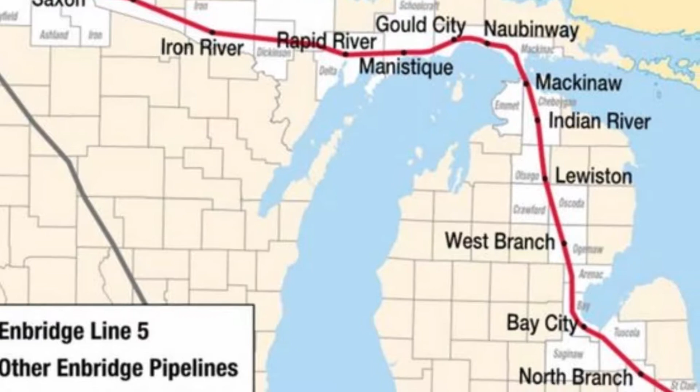It started because the Enbridge pipeline is aging and people are concerned about it rupturing or it being hit by an anchor or something. Back in April, there was an anchor strike that hit the Enbridge line and it tore the ATC transmission line, which leaked hundreds of gallons of their fluid. And so we have seen that this thing is a very feasible issue. It's something that could happen.

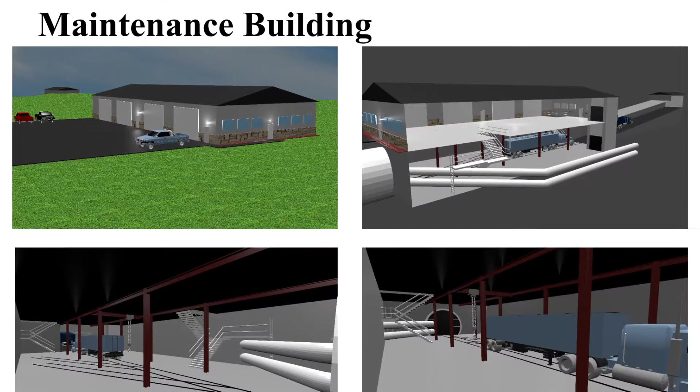This group is a team of Michigan Tech students who conceptualized a tunnel design and presented it to legislators earlier this year with the presence of Enbridge officials, who are using the presentation and its research as a starting point for the upcoming build. They were very confident in our information. They felt good about using the information to try and make their point. And so it was really nice, just being undergraduate students, to actually be taken very seriously.

Currently, the line crosses the straits in two parallel tubes about 3 miles west of the Mackinac Bridge and allows for the transport of petroleum products to Sarnia, Canada, traveling along US 2 in the UP and I-75 in the lower for much of its journey.

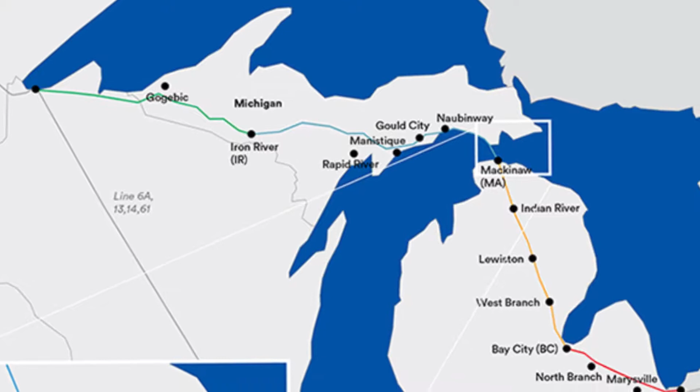Once construction of the tunnel is completed, those lines would be removed from the lake bed and placed in the tunnel where they would be isolated from the natural waters, theoretically preventing a disaster if a line failure were to occur in the crossing. It wouldn't leak out, or at least not so much, into the environment, and they could easily clean it up within a contained tube, basically.

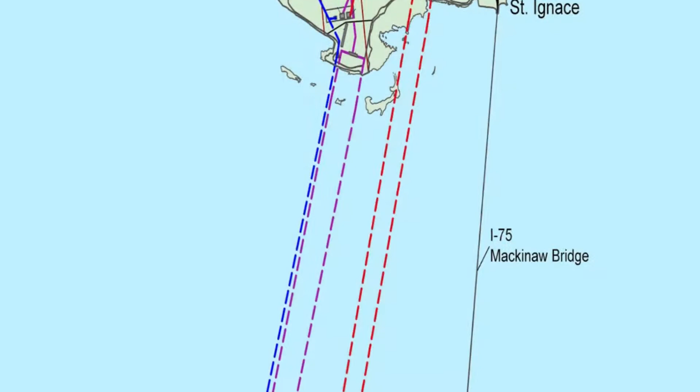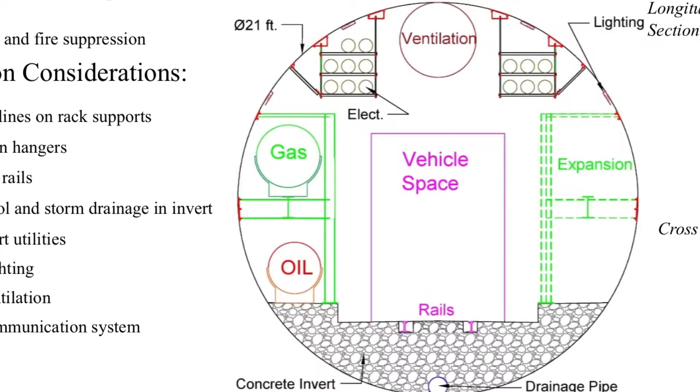While conducting their research, Michael and his team discovered that there are other things that cross the straits in that area as well. And the design that they presented legislators would allow for safe crossing of those lines through the same tunnel. There are many electrical lines, there's a natural gas line, and then there's the Enbridge oil line. And so there's quite a few down there that it would be good to encapsulate them all so we don't have any leakage of any of them.

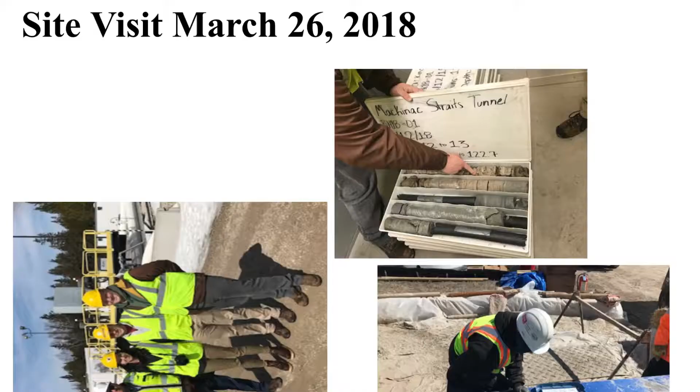Currently, those lines are simply lying on the lake floor, and building such a tunnel is uncharted territory in the Straits. The only known bedrock borings are more than 60 years old from the construction of the Mackinac Bridge's tower bases. We took the borings that we knew of and stuff on the surface and we tried to predict what it would be like. The team that did that actually did a very good job because they went down on a site visit with Enbridge because they were doing surface borings on the land, and they were able to confirm that what they predicted was very close.

And so it was kind of cool to figure out what's down there, and then from there we could figure out the tunnel structure and figure out how strong it needs to be, how good the rock is down there.

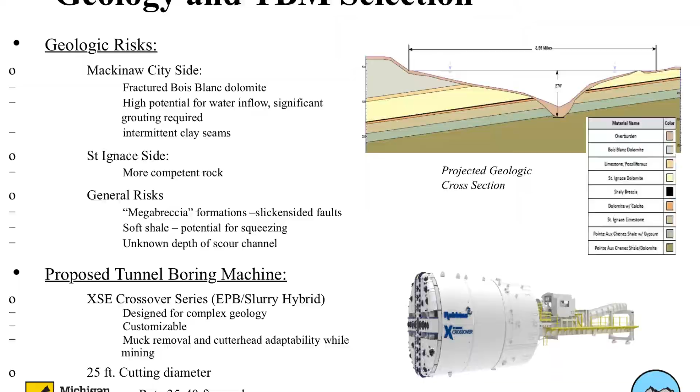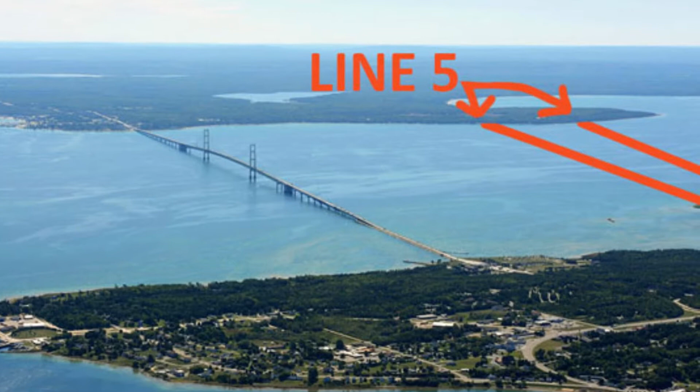Although it's likely that Enbridge will alter the design or create a different blueprint altogether, Michael and his teammates are proud to have played a part in creating a solution to environmental concerns that come with pumping millions of gallons of crude oil across the Straits of Mackinac every day. I think it's just really cool for me as a student to have worked on something where maybe my direct engineering isn't going to be implemented, but the concept and the idea kind of started it all.